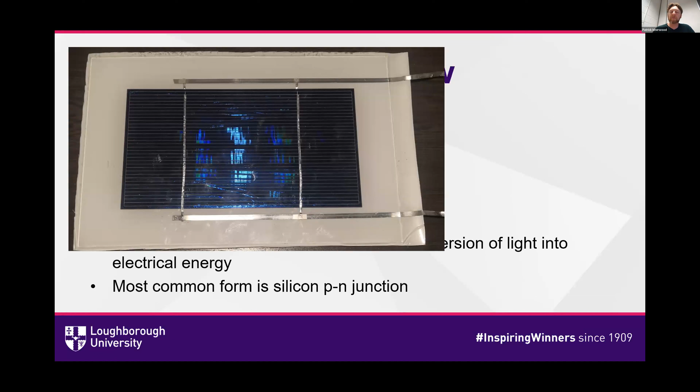I mentioned CdTe before, and hopefully we'll have a bit more detail on CdTe recycling later as well. This is just for comparison. This is a research CdTe device made at CREST. But it's these guys, as I say, that I will mostly be talking about, the silicon modules. They cover about 90%, 92%, something like that, of the current panel market.

Okay, so why do we really need to think about recycling photovoltaic modules? Why is this an issue? Well, first of all, the installed capacity of photovoltaics in general has been increasing approximately exponentially for about a decade, maybe a bit more at this point, which is a really positive thing. That's great from an electricity generation perspective, but it does create problems in terms of the waste, the end of life issue with PV modules.

So broadly speaking, modules tend to have a stated lifetime between 20 and 30 years. Usually about 25 years is the industry standard. What this means then is that the number of modules coming offline will also increase approximately exponentially within the next decade or so. That means that we're going to end up with an exponentially increasing number of waste modules, or end of life modules, let's put it that way, as we move forwards.

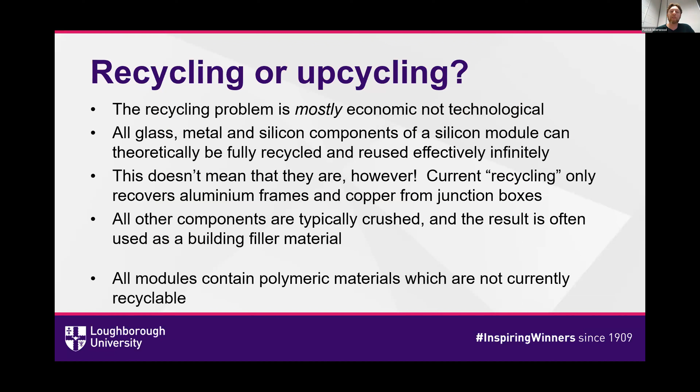This is all then held together using an encapsulant, which is essentially a kind of adhesive. That's effectively what holds the entire module together. You've then got some kind of protective polymer backsheet, and then the whole lot is held in place by an aluminium frame. You typically also have some kind of a junction box on the back, which is basically the point where you can extract the current from the device.

And essentially, that gives you a thing a bit like this little cell I showed at the start. So this is very much the same thing. It's only got one cell instead of half a dozen or however many.

So when it comes to recycling these things, you can split the different processes up into two general types, if you like. We've got delamination processes, where essentially what you're trying to do is separate the module with as little damage to the internal components as possible. Or you've got crushing processes where you don't really care. You just smash the whole thing up and separate it out later.

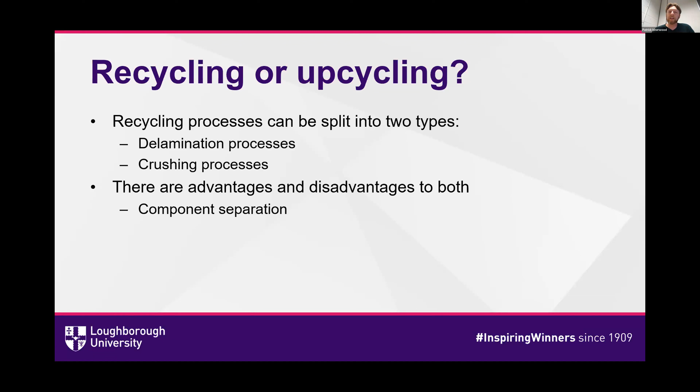Otherwise, if you're doing something like a crushing process, you tend to have to use some sort of density separation system, so froth flotation or a dry separation process. Those are a bit more complicated, but actually they're fairly well understood. They're things that the mining industry have been using for a very long time for ore extraction and ore concentration. So actually, we know how to do that. We're pretty good at that.

I already mentioned a certain amount of manual versus automated processing. This is quite an important thing to consider, because obviously it will determine things like labor costs and so on, and also to some extent how fast you can run the process. And then of course there's things like environmental concerns. So particularly with some of the pyrolytic processes, waste gases are a major problem.

A lot of the backsheet polymers are typically fluorinated, so you can end up with fluorinated waste gas, which is an environmental pollutant. A lot of the processes also use some fairly nasty solvents and some pretty unpleasant chemicals, things like nitric acids, hydrochloric acids, and so on.

So that's not necessarily a problem, but it does mean that you need to be quite careful about what you do with that, and then what you do with the waste materials or the solvents and the chemicals once you've used them. What do you do with them? Where do you send them? There are waste streams for dealing with that, so we can make use of that, but it's definitely something that's important to think about.

Okay, so moving on then quickly, just very aware of the time, to what exactly it is we can extract from a module. Well, there are three key expensive parts in a silicon module, if you think about it. Silver. It's actually a fairly minor component of a module, but in terms of value, it's one of the higher value aspects of a module: the silver bus bars, which are usually screen printed onto the top.

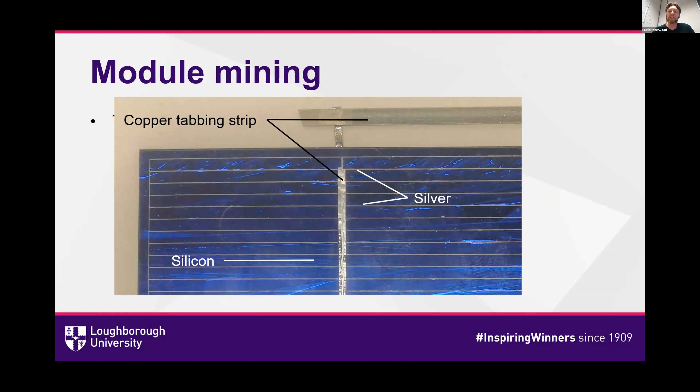So just going over those different parts, you've got the silver bus bars, the thin wires that are screen printed onto the top of the cell. You've got the silicon, which is the blue colored wafer underneath, and then the tabbing strip, which is actually copper. It doesn't look like it, but that's because it's pre-soldered, so it has a solder layer over the top.

It's worth noting as well that the proportion of silver and copper in a typical module is actually considerably higher than most commercial ores for these two materials. So extracting the silver and the copper from the module should be economically viable, and it should really help with the economy of the recycling process, in theory.

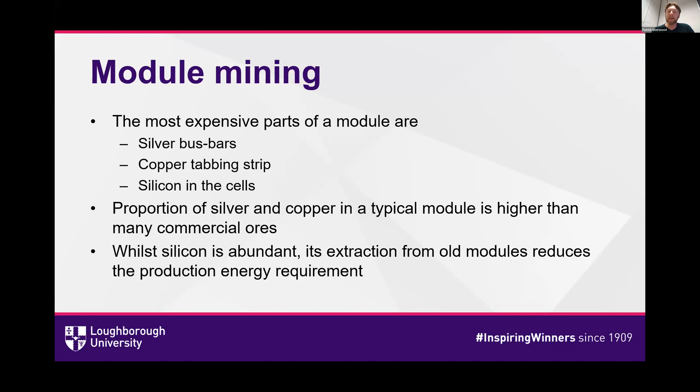And while silicon is definitely abundant, its extraction from old modules should, in theory at least, reduce the energy required for the production of new silicon. So again, in theory, there should be some kind of a saving there. That isn't to say that there necessarily is, but in theory there could be. You will, however, initially at least, only be able to extract metallurgical grade silicon, the lower grade material, which will then need some sort of purification to get back up to the solar grade material required to produce new devices. But at least it's some way there.

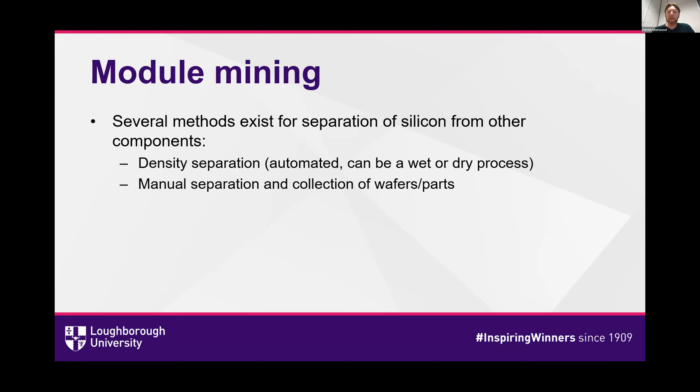As I've already mentioned, there are a number of methods for the separation of the different materials, the different components. So we've got density separation, which can be automated, and can be a wet process or a dry process. There's a number of different ways of doing that. There's then manual separation processes. Typically, they would be used with a delamination process rather than a crushing process.

And there are various different automated processes as well. Some of those things can be automated, some might not be able to be, or it might be easier to. It depends very much on what exactly it is you're trying to do, but automation tends to be quite a good way of increasing the rate with which you can do things and making things a bit cheaper.

As I say, the silicon, once you've got it, is then metallurgical grade. It does still require refining to get back up to the true feedstock, the solar grade material. And that's quite expensive. My understanding at any rate is that for now, it's still not necessarily economically feasible to get back to solar grade silicon during the recycling and recovery process.

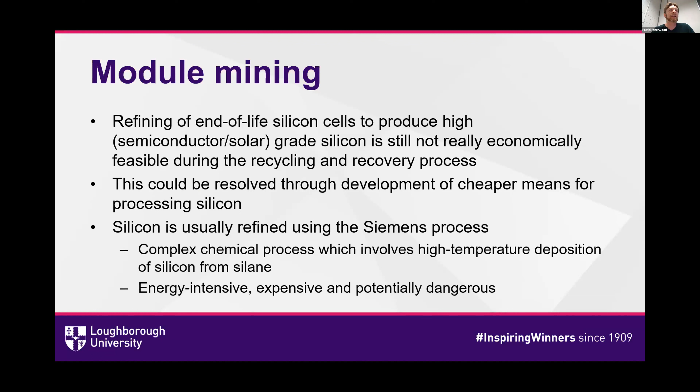But that could potentially be resolved if we could find a cheaper means for processing silicon. That might be a big ask. It's quite a difficult thing to achieve, certainly, but there may be ways of doing that. Silicon is typically refined using a thing called the Siemens process. This is quite a complicated process. It involves very high temperature deposition of silicon from silane gas. So it's an energy intensive, quite complex and relatively dangerous process. It's not an easy thing to be doing.

Okay, so moving on to the polymers and the polymer elephant. So the key thing here really is that all current modules contain polymers in some form. In particular, the majority of modules, although not all, most of them have some sort of composite polymer backsheet, usually involves something like Tedlar or some sort of similar material.

These are all fluoropolymers, so polymers that contain fluorine. The reason for that is because it repels water quite nicely. They tend to be quite hydrophobic in that sense. So it's a good way of maintaining the integrity of the module itself.

Okay, 2 minutes left. Thanks, Lewis.

And pretty much all modules use EVA, ethylene vinyl acetate, as a binder. That's the kind of adhesive. So composites, first of all, are quite difficult to recycle because of the different materials they contain. And particularly if they've got several different materials in there, that can make it really quite complicated because you don't necessarily know what's in the material and what isn't.

And EVA is a copolymer. So the problem with that is it's a blend of two different materials. What that means is that you get some cross-linking between the two. So that can be a real issue because you can recycle it if it's not cross-linked to some extent. But my understanding of it, at least, is that once it has cross-linked, it becomes really quite difficult to recycle. So this is really quite a serious challenge. It's quite a difficult thing to deal with.

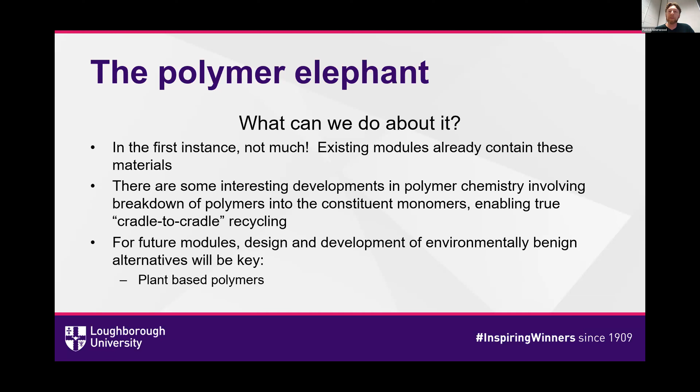And for future modules, the design and development of environmentally benign alternatives is going to be key. So something like plant-based polymers, such as starch, for instance, or viscose, where because it's plant-based, you can recycle it, but if you can't recycle it, you can burn it. That's not ideal, but it's not the end of the world. It's a relatively recent carbon material. It's not a fossil material.

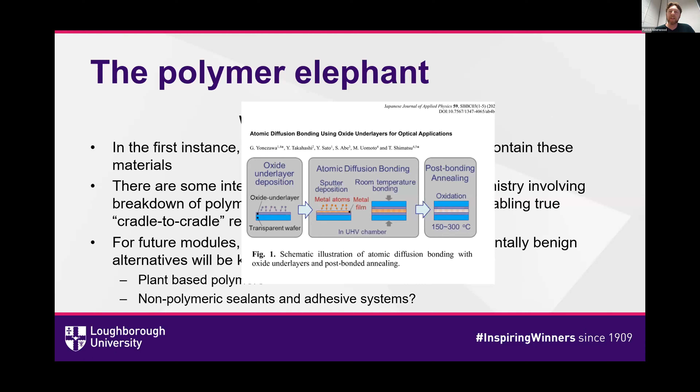Or alternatively, a non-polymeric sealant or adhesive system. Now, this is more complicated. There are examples such as this paper here, but they're quite difficult to achieve, and I'm not really sure how viable that is, but it's definitely worth a look.

Okay, so I guess the key takeaway from this is that PV module recycling, refining, upcycling of constituent materials is really important. It's a key area for further research and development. An awful lot of the issues, pretty much everything apart from the polymers, really is economic, not technological. And finding economic means for the production of high-grade materials from end-of-life modules is really, really important. It will mean that we can get full recycling of the modules, and it will be a competitive alternative to the production of virgin materials. But the polymers are still an issue.

So just very, very quickly then, my thoughts for the key places to go for the future. Module construction: I think it's really important to try and design modules both for long-term outdoor stability, which we really need, but also for the ease of deconstruction and recycling. It's quite a big ask, but I think it's an important thing to try. And then to develop sensible and fully recyclable alternatives to the polymer materials which we're currently using. So something which we can recycle more readily, or alternatively, which is plant-based.

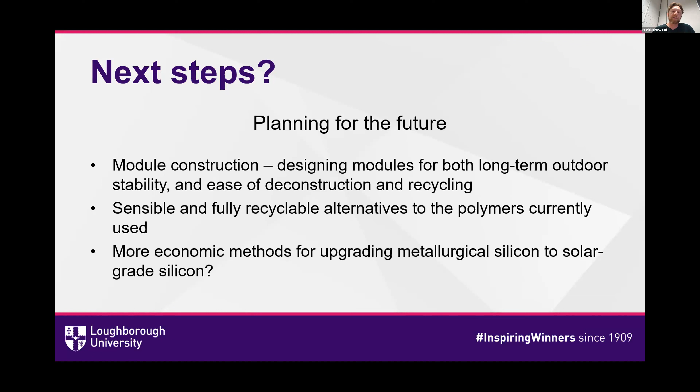And then finally, more economic methods potentially for upgrading metallurgical silicon to solar grade silicon. That's a big ask, but if we can do that, that would be a really big breakthrough in my opinion. Okay, thank you very much.

Excellent. Thank you very much for that, Patrick. So we have some questions that have come in. One from Andrew Urquhart, who is asking about silver. He's quoting a BBC article saying that silver's going to become a bottleneck to manufacturing some of the new panels in the future. So what other comments do you have on recovering that valuable material from the panels?

Well, I think it's a really important one to recover, certainly. Silver is an interesting one. It's not actually hugely rare, but it's not very common either. It's a precious metal for a reason. The reason it gets used for the bus bars is that it's, I believe, the most conductive single element metal that we have, and it doesn't oxidize very readily. I mean, it does, but it doesn't oxidize that quickly. So it's a really good material from that perspective. It's a really good current collector.

So in theory, we could replace it. We could probably use copper as an alternative, or possibly something else, but it's difficult. There's nothing which is ever going to be quite as good. If we're going to carry on using it, then absolutely, we need to be recovering this stuff. I think that's fairly key. Because it's expensive, recovering it is likely to improve the economics of the recycling process. If we can find an alternative, then fabulous. But definitely it's something that needs recycling, and recovery and reuse is definitely the way forward, I would say.

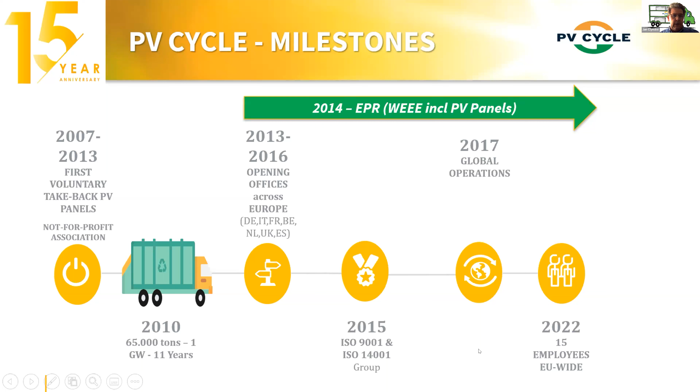PV Cycle as well has established a quality management system since 2015. We are more and more operating on a global level, and we run everything for now with 15 to 16 staff members. And that's what we're doing.

Already highlighted by Patrick, a PV panel. So maybe a weird slide, but I'm always showing it to the PV community in that sense that when a waste guy, a true recycler, I mean, one who is already in business since many years and is only crunching material and waste, is looking at a PV panel, he says, wow, this is 80% or even more, 90%, or even 95, depending on which technology. It's a bunch of glass, a lot of flat glass, and a bit of ferro and non-ferro metals, whereby aluminium is taking the biggest share, followed by a bit of plastics and a bit of other ferro and non-ferro materials.

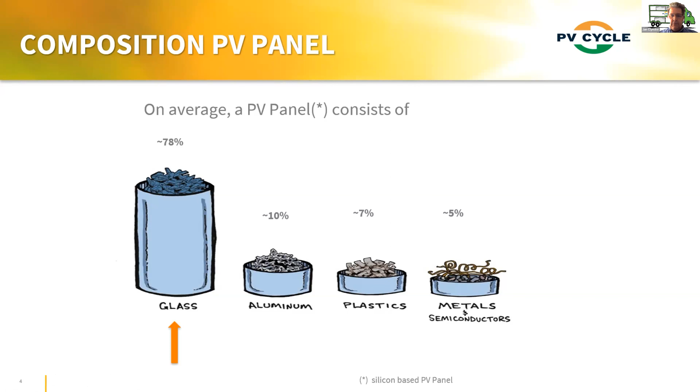It's not metals and plastics. It's not like your laptop. It's not like your mobile phone. It's not even like a washing machine, which is full of metals. So it's a glass, mainly a glass product.

And that's important. But what is also important is that the PV panels, and it was tipped off in the question of Silvana to Patrick, yeah, what about, do you want a product which has a long lifetime, which has a product guarantee of 10 years, performance guarantee of 20 years, maybe some feed-in tariffs by some policymakers giving you 15 years or 10 years or whatever, some money from the government?

Do you prefer this? That it prevents for many years waste, that it prevents for many years cost for the society? Do you want this as community, as society, or do you really want a mobile phone, Steve Jobs coming on a stage every year and telling you, I have a new product, throw away the other one and buy a new one?

That's also an option where you can stand in, but then you are not really preventing waste. So then you are in the classical economy of producing, manufacturing, and consuming as fast as possible and generating as fast as possible waste. PV panels are preventing waste for a long time.

And when they even become waste, especially the ones which economically have an end of life, the bigger investment PV power plants, well, most of them, maybe, yes, you can reuse them. Why not? You can extend even their lifetime. So it might be still extended with 10 years, and then they only become really a waste product, which then, yes, you can throw into the recycling and the recovery and the treatment, and you treat the products with a pre-treatment facility, with a final treatment facility, and so on.

And of course, we avoid disposal and landfilling, at least in most of the countries on this planet. So that's what I said at the end. Yeah, we miss the waste. Where is the waste? It sounds a bit weird, yes, asking for waste. But on the other hand, we have to stress much more as industry that we are preventing waste, that we are preventing cost for the society and for a lot of other items as well.

It's what I already explained, but that's here also the question raised by Silvana again. Yeah, is this what we want? Do we want to develop an easy to recycle, an easy to reuse PV panel where maybe with 3 clicks you remove everything, the glass, the junction box and whatsoever, and you can easily detach it and you can easily repair it, you can easily recycle, but then you will have a product with probably a lifetime of 1 year, because a PV panel, once it's sold, it's really living outside.

It's not like your mobile phone. It's not sitting in your pockets. It's not like your washing machine, which is protected in-house and so on. No, it immediately lives in temperatures of -20, +20, +40, sun, hail, storm, snow, wind, whatever. So, or do you want really a product which has a long lifetime, which is generating electricity for a long period, which is really a good investment product? So that will be the challenge or the curse. That's up to further discussion.

And about reuse, there is a huge potential here as well that PV panels are contributing to an extended lifetime, but we are looking for conditions which at the end of the day, you have a qualitatively and environmentally sound reuse activity.

Without guarantee, maybe, okay, why not? But at least then also for the ones without guarantees, make sure that they have undergone some testing, or you really give them also a guarantee of maybe 1 year product guarantee, 18 months of performance guarantee, and you also provide them with some extras, which you will see in a minute. But that's the main question here as well.

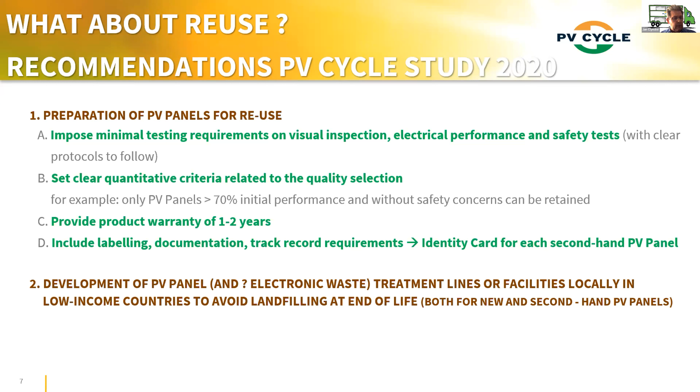because what we see today in the study is that a lot of these panels are shipped to Sahel countries in Africa, Afghanistan, Pakistan, Palestinian territories, and Turkey. Those are the top destinations of what is currently called in the business reused PV panels. Then you have to ask yourself, do all those countries have a good waste management infrastructure today, at the same level as some countries in Europe or other territories of the world? And the answer is no.

And of course, what is also very important is that a reuse center, which is really preparing the panels for a second life, has clear criteria and clear requirements on what has to be in place there. Do they need skilled people or not? Or people who have no clue what AC and DC means? I think they need them, because at the end of the day, it's a product which is generating electricity, far more challenging, I would say, than repairing a laptop, which is consuming electricity.

So the guarantee I would like as a purchaser, as a buyer of secondhand PV panels, I would like really a true guarantee, and I would like to be 100% certain that I buy something very good, very qualitatively, and that it's properly done, and not something which is just a little bit washed and go, and then it's sold online and whatever, and you have no clue what you're buying.

So that's also why PV Cycle, after the study, said, okay, let's try to initiate maybe a standard. And our hope was maybe getting this done on a European level, but an opportunity took place, and we could even bring it to the IEC level, the International Electrotechnical Commission, where in Working Group 82, we put it on the table saying, guys, this is the item, and it would be good to have an international standard that all countries around this globe apply the same thing.

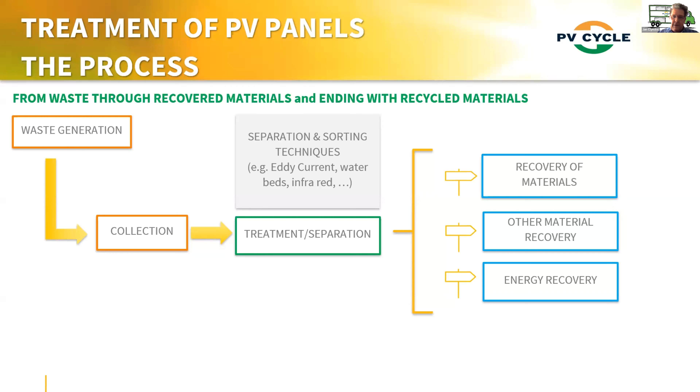So I would invite you all, visit waste recyclers, visit waste management companies, and that will already help a lot in the whole discussion. But anyway, once it's all treated, materials are recovered. Then you can really recycle the mono materials, which are glass or copper or whatever. But you will always have materials ending up in other material recovery, for example the smelters, and you will have material which is ending up in energy recovery.

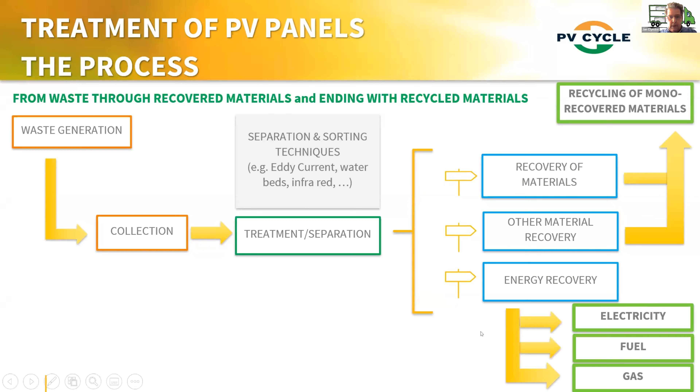I'm also seeing that I have to speed up. Generally speaking, we have an average recycling rate today of 70%. Is this good or bad?

I think it's quite good if you compare it to all the products you see here, which are also under EPR in Europe. A lot of them are below the 70%. But as I already mentioned several times, volume, that's the big thing, and that's the big discussion. Do you want very consumable PV panels to put on the market, or really products which have a long lifetime and are an investment?

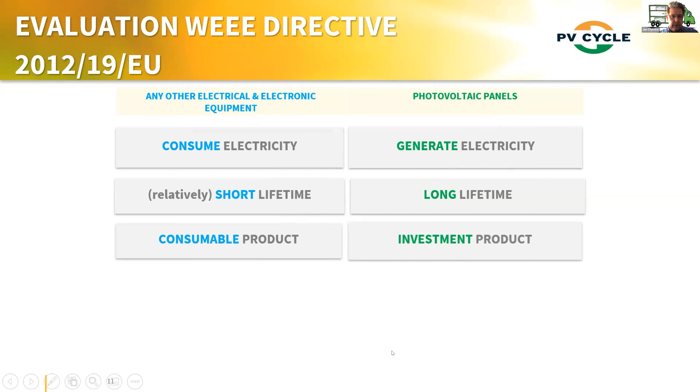That was maybe our evaluation, and it has been recently published, our evaluation of having PV panels under the WEEE directive. I will not go into detail. You just see them, and you see constantly the difference between PV panels and the other electronic equipment of the WEEE directive. And you see that there are big differences between both products constantly. The one has a stable market, the other has maybe a more volatile market.

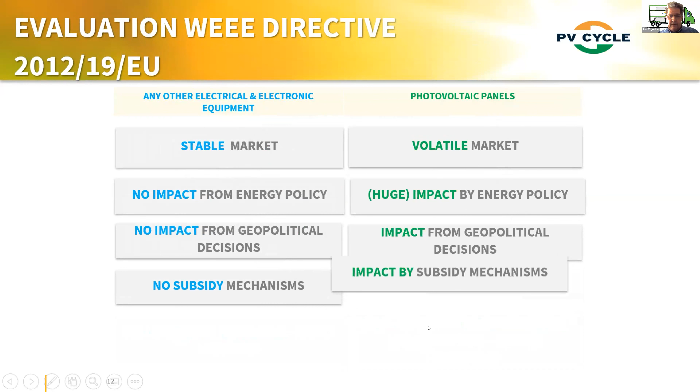When somebody decides in the eastern part of the world to invade another country, like it happened last year, it has immediately an impact on our business. I don't think it has an impact on the sales of iPhones, for example. So that was a bit our evaluation of the WEEE directive. I will leave it as it is and not focus too much on it, because we are running into a final slide, which is a short evaluation about the United Kingdom. I would say the evaluation is a little bit the same.

So our message is really, as PV Cycle, after all those years under the WEEE directive, this has never been the proper instrument to manage extended producer responsibility for products with a very long lifetime, which are investment products. We are pleading for a separate legislation. We are not arguing about the EPR, but we would really look forward to something for all renewable energy equipment and products, putting there also all the products which have a huge investment potential.

Because discussing collection targets for PV panels based upon the sales of the past 3 years, that's completely insane, because nothing is coming back. So we will never achieve the targets. And in some countries today in Europe, you even receive fines as PV Cycle because you did not reach those collection targets. So that's insanity. But the same evaluation of the WEEE also applies to the UK.

Also, the UK has a huge challenge, Lewis and the rest of the engineering community, looking for environmentally sound treatment for PV panels. That's really today a challenge in the UK. And what we also see as PV Cycle is a huge impact of Brexit: it's more difficult to ship PV panels out of the UK to the continent, where today environmentally sound treatment exists.

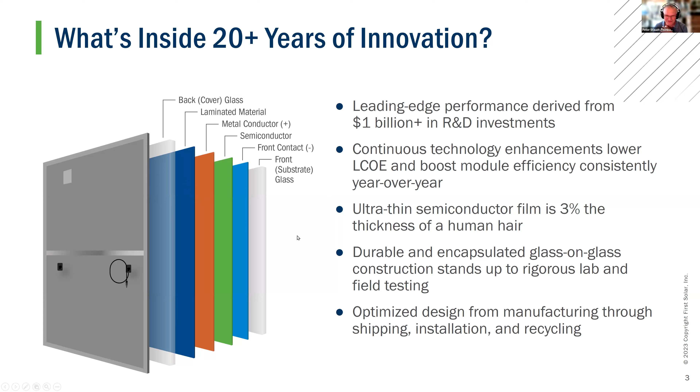We need a back contact, obviously, and then we have the lamination material, which has been EVA in the beginning, but I think now we are using polyolefin, which is a little bit simpler for recycling, and especially it makes the whole chemistry of the module more stable, so we can have a better lifetime.

So that leads us to our recycling process. You can see here our old Series 2, 3, 4 modules, they all had the same size. They go to a shredder first and then to a hammer mill, where we have particle sizes of around 4 millimeters. After that, it goes to a leaching process where we use sulfuric acid and hydrogen peroxide. Then we can separate the materials, mainly the glass, which is around 90% in our case, the polymer, and the semiconductor material, which is precipitated out of the solution of sulfuric acid and hydrogen peroxide.

This one goes to refining, to special companies like 5N Plus in Canada, and they again produce high purity cadmium telluride, which we use to build new modules. So we have a real recycling process here. For the glass, in Germany we have a first generation recycling plant where the cleanliness of the glass is not good enough to produce glass products. So that is used to produce insulation material for the construction industry. And the main reason for that is really that the volume is not high enough.

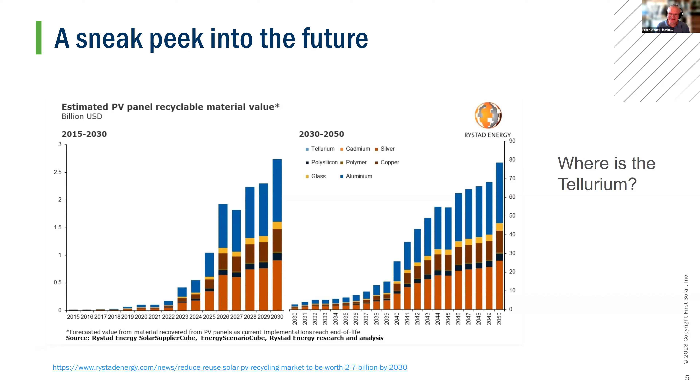And it's only a byproduct of copper and tin mining. So we really need to have the global tellurium base for First Solar to achieve that 20 gigawatt production capacity. And that's one of the main reasons why we started recycling so early, because we knew we need the tellurium back.

So to have a broader view, I like to refer to the work of the Club of Rome, which built that famous World 3 model 50 years ago, which has seen a lot of criticism, mainly from the fossil lobbyists. But there are also recent investigations, and they found that the current empirical data is broadly consistent, even with the 1972 projections. And in my opinion, that is frighteningly accurate, and it's really extremely important that we change the whole economic system with respect to material use and use of our environmental resources.

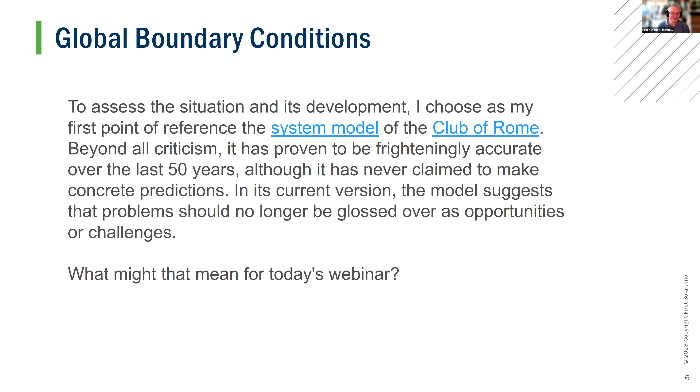So the latest outcome of the Club of Rome working group has defined 5 turnaround actions to mitigate the worst outcomes of the climate crisis. And turnaround 5 is transforming the energy system. And there's one tiny remark, so drive down use of materials. So that's where we come in.

And we see from our old modules, which are running now for 20 years, they are still in good shape. They show better performance than what we guaranteed. And they are good for at least 30 years. And for the new modules we produce, we expect that they have a useful lifetime of more than 40 years. And also in the silicon field, there are meanwhile producers who give a guarantee of 30 years.

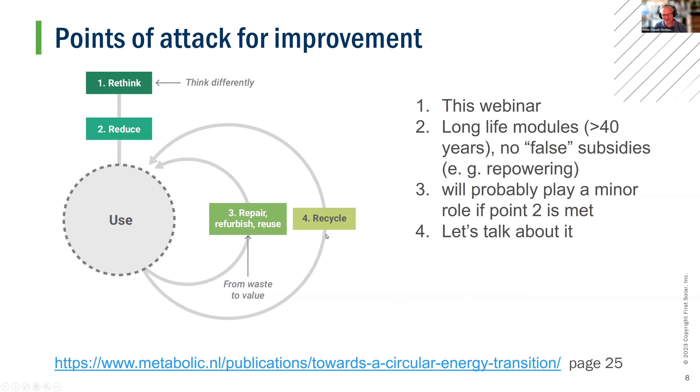We have nothing in to repair, not even the diodes which are used in the junction boxes of the silicon modules. So if our module is broken, it's broken. If it does not produce power, you cannot do much. So, and then of course you come to recycle. And that leads us to the problems and potential solutions.

So Jan showed a picture where he had neatly stacked modules on a truck, which looked like they were new. That's not what we see. We mostly get improperly dismantled and significantly soiled modules back. On average, I would say 50% of the modules are broken already. So that is also a problem for automatic handling if you try to do this. The point is that the dismantling is mostly done by cheap manual labor.

And as long as the end of life modules do not have a monetary value, I don't see a possibility to change this, at least not for our modules. So, in my opinion, we need to put that value into the module by regulations, by CO2 pricing, whatever you can do that makes sense to get that value into the end of life module. So everybody would be interested to give it back to get some refund. So that would for me be one important step.

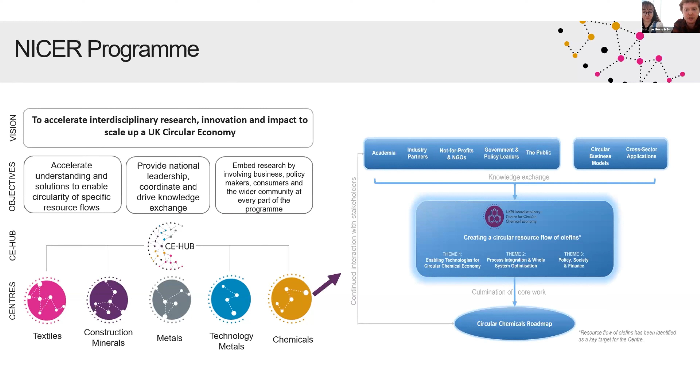Now, what Circular Chem are trying to do is create a circular resource flow of olefins by using a whole systems approach. Our stakeholder engagement and knowledge exchange inform our core research themes, which will then culminate in a roadmap which I'm currently developing as well. So who we are: not just the Circular Chem Centre, but we're also part of the Energy Materials Lab, and Susanna's going to present a little bit of work later on in the case study of the Vital Living Lab, and our PI is Libby Gibson.

So why are we doing this? We need to move away from fossil-based feedstocks for our energy supply. I think around 87% of GHG emissions are from energy production. We also need to create a more resilient supply chain and infrastructure. We can see from recent geopolitical crises, such as the Ukraine-Russia war, that reliance on one particular energy source is not resilient infrastructure, and the general consensus is we need an energy mix.

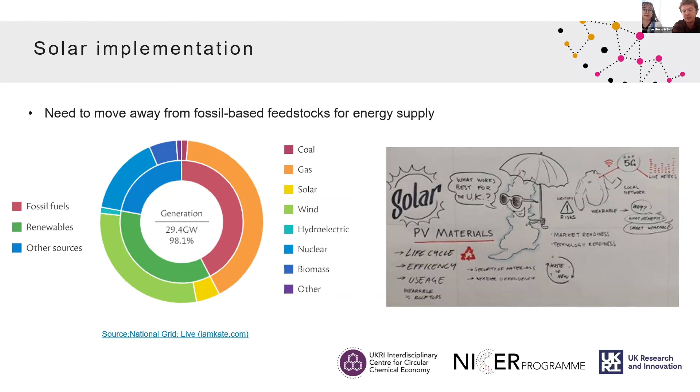What are the main barriers that we're starting to see with circular PV? There's significant waste generated in current established solar PV technology. I think there's projected to be about 78 million tons of silicon PV waste by 2050. As Patrick mentioned earlier, with the lifetime that we have for current panels, we're going to see a huge influx of silicon PV waste by around 2030.

Other levers that they can use, such as feed-in tariffs, which discontinued in 2019, are a bit of a missed opportunity to utilise a lot of the rooftop spaces we have in the commercial and industrial sectors. Government stats suggest there's about 250,000 hectares of south-facing roof space we can take advantage of in the UK.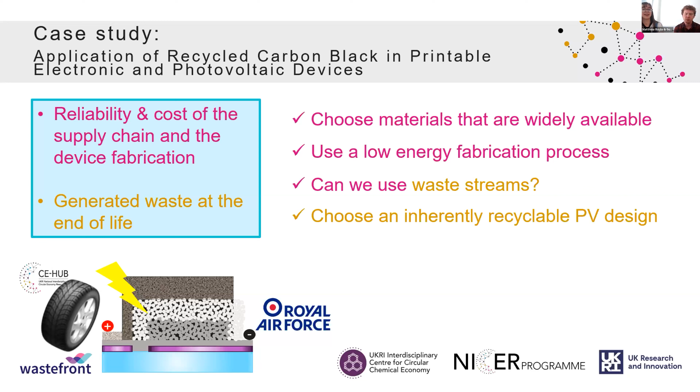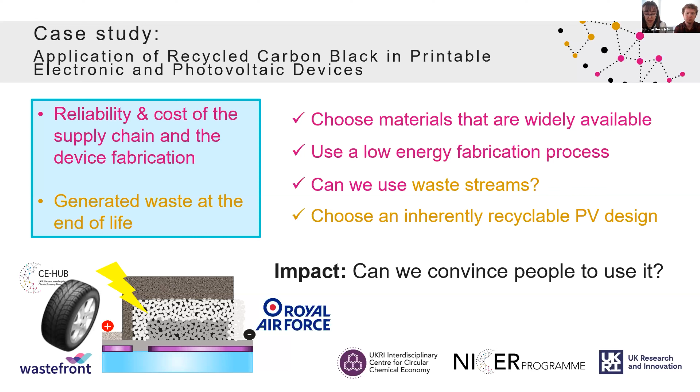And then finally, we also need to choose an inherently recyclable design so that we don't have to worry about how we're going to recycle something at the end of its use without thinking first on whether it was recyclable in the first place. And I wanted to add a last one, and that is the impact, because even if we manage to get to this point where we have a very inherently recyclable technology and we don't generate waste, can we convince people to use it? Do they know that this exists? So I'm going to tackle all these points in the next slides.

And for that, I'm going to start talking about the device technology that we're using. For this case study, we started using a device architecture that is called the triple mesoscopic stack. So basically what we have in here is several layers of different materials, which are the transport layers, so the charge extraction. And then we have, let's say, the magic layer, where the magic happens, which is the photoactive layer. This is the layer that is going to absorb light and then generate charge.

And for this particular case study, we chose halide perovskites, although we could have chosen another technology. We chose them because they're cheap. They're made of widely available materials. We can look here. This is the structure of a perovskite. They are ionic crystals with an ABX3 structure. So you have either iodide, bromide, chloride in the red dots. Then forming a cube, you have normally a metal that is predominantly lead, but it could be tin. And then in the center, you have either organic cations like methylammonium, formamidinium, or other inorganic elements like cesium,

potassium, etc. They have the advantage that they are easily processable at low temperatures, because they can get dissolved in a solvent, and then you can pretty much create an ink, and then you can print these inks and it dries at 100 degrees. So low energy processing, as we ideally wanted. They have the peculiarity that depending on the elements that you choose to form them, you can change the color, which means you can absorb into different wavelengths. And that allows you to do interesting things, like getting different colored cells and working with different absorbers as well, so that you can create a tandem, for example.

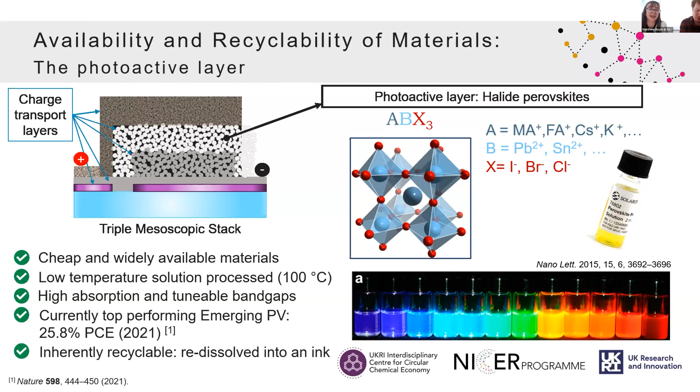Now, on to the second part of the device. So we've talked about the photoactive layer. Now we have to talk about the other layers that I highlighted before that in theory aid charge extraction. And those are also made of cheap and widely available materials. For example, you've got the counter electrode, which is in this case carbon. We've got a spacer, which we use just to prevent the carbon from touching the other side of the cell and creating a short. In this case, we chose zirconium oxide. The titanium dioxide will help the electron charge extraction. And then we have another electrode, which is a transparent conductive oxide. In our case, it is fluorine-doped tin oxide.

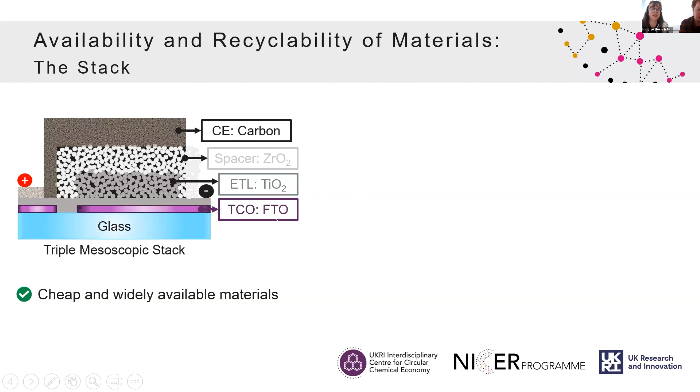Now, the fabrication process is very easy to upscale because it's a sequence of layer depositions. So you start with the spray pyrolysis of the compact layer of titania, and then you just build layers and anneal them progressively until you get the full stack. They are not as low temperature as the perovskite itself, but I think the maximum temperature you will be working with is 500 degrees, which is significantly lower than the fabrication temperature for standard commercial devices. And then in our last step, you just infiltrate the perovskite, and it crystallizes by heating at around 100 degrees. So that makes the process very easy and upscalable.

But then we've got an extra, which is we can reuse it. Why? If anything in the perovskite solar cell is more likely to degrade, that is the perovskite itself.

And if we were to remanufacture them, the only thing we need to do is dissolve the degraded layer with some solvents, re-anneal the stack to dry it off and remove all sorts of impurities, and it'll be a matter of just re-injecting again.

So as you can see in this project, we're considering circularity by design so that we are always able to do this cycle. Eventually, I'm assuming at some point they could break, but they are quite common materials. They could be scraped off the conductive glass surface, crushed and separated, and we could start again.

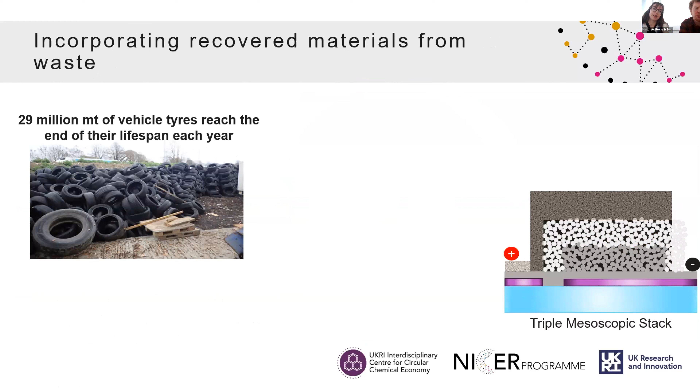Now, what we're doing in this project is incorporating tires into a solar cell, and you will ask how. Well, first of all, let me talk about the waste stream that we selected. In this case, we selected tires because we know that around 29 million metric tons of vehicle tires reach the end of their lifespan each year.

And if we think of what's happening with them, some of them will end up dropped in a landfill, around 10%. That has a problem, the risk of polluting water streams, just based on the fact that they're in the outdoors, it rains on them, then toxic elements percolate through the ground and contaminate water streams.

Another option would be to burn them to get energy, but we are releasing like 22 kilograms of CO2 per tire, so that's not ideal, and we're not even getting that much energy because it has a poor energy recovery, like 33%.

Another pathway is the standard recycling. They just get chopped and made into sport pitches, but at the end of the day, if they just get chopped and deposited again on the land, they're still subject to potential contamination or pollution of water streams because it will rain on them and that will percolate.

So what our partners at Wastefront have done is design a proprietary process that minimizes the waste, the use of CO2, water, and heat. And they produce pretty much two main products. One is liquid fuels, for which they have customers in place, and the other one is carbon black.

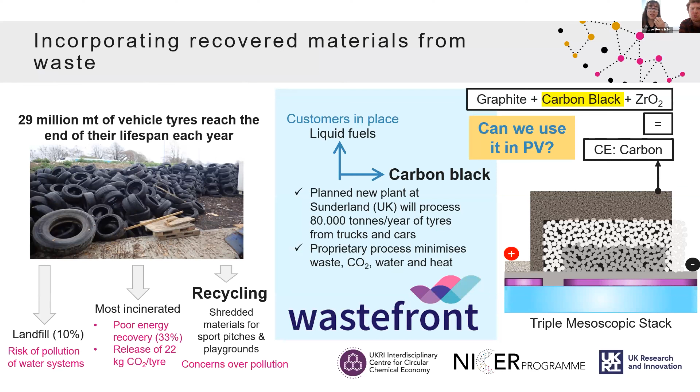So this carbon black is one of the components of the carbon electrode that we saw in the triple mesoscopic stack before. And that is what made us raise the question, okay, can we use it in photovoltaics? Basically, the answer is yes, and not only can we use it, but we can even improve the system.

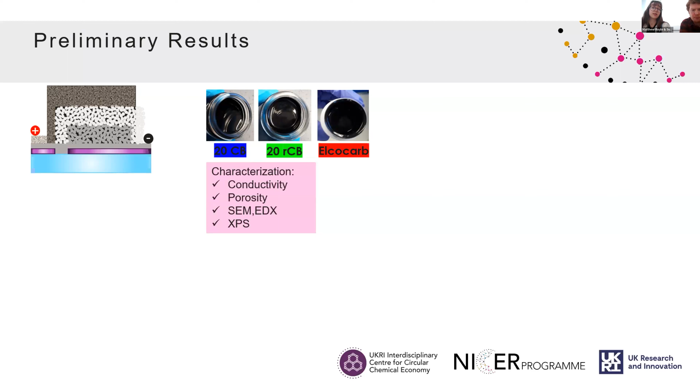So basically what we did, we made different pastes using virgin carbon black, which is the 20 CB, recycled carbon black, which is the 20 RCB, and the ElcoCarb, which is a benchmark, a state-of-the-art commercial paste. We built them into solar cells.

So we had a reference, number one, the monolithic, which would be the full stack that is optimized, and it's purchased from the same company that produces the ElcoCarb. And then the other three, which are also purchased, go up until the zirconium layer, and then we deposited our ElcoCarb paste. And what happened was very interesting.

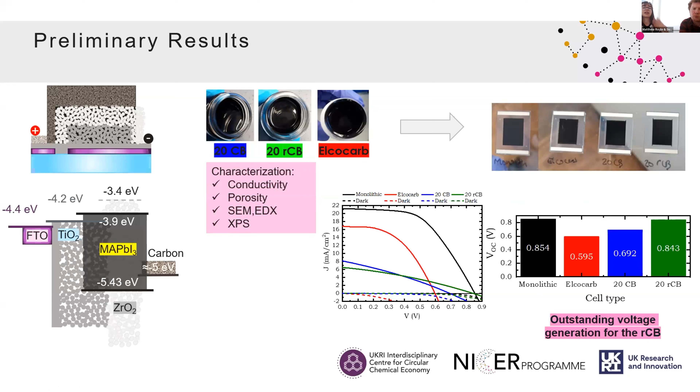But what was interesting is the fact that we got a really high open circuit voltage compared to the, let's say, commercial stack where we just infiltrated perovskite. And that made us think that indeed, the charge extraction layers are now extracting better. But when I mentioned the charge extraction layers, what I mean is how do they aid extraction?

Well, basically, if you connect a circuit or any load to the solar cell and then you illuminate the perovskite, you're going to be producing electrons that jump towards the conduction band, and then they get extracted by jumping into the conduction bands of the other materials and then running back and getting re-injected through the carbon. So if we were an electron and we had to run downstairs as fast as we could, obviously we would run faster if the steps are smaller.

So what we think has happened here is that the recovered carbon black has lowered this step, the valence band of the carbon, and that is what makes the open circuit voltage bigger. And this has to do mainly with impurities. Obviously, we need to keep doing more testing and optimization, but we're proving the point that yes, we can make perovskite solar cells using recovered carbon black.

Now, the last point that I wanted to talk about is the impact. So as I said before, even if you manage to get something done, can you convince people to use it? Or can you convince the authorities that this is important? So that's why we also embedded this project or case study into the Vital Living Lab project, which is a project of Newcastle University in collaboration with the Royal Air Force.

We have 5 main experiments. We have solar, we have geothermal, LCA and carbon accounting. We have sustainable transport and carbon capture. And basically what we're doing with these experiments, we're trying to help the Royal Air Force meet the targets to be net zero by 2040, but we're working with technologies at TRL level 3 and below, so very emerging. We're just trying to prove a point.

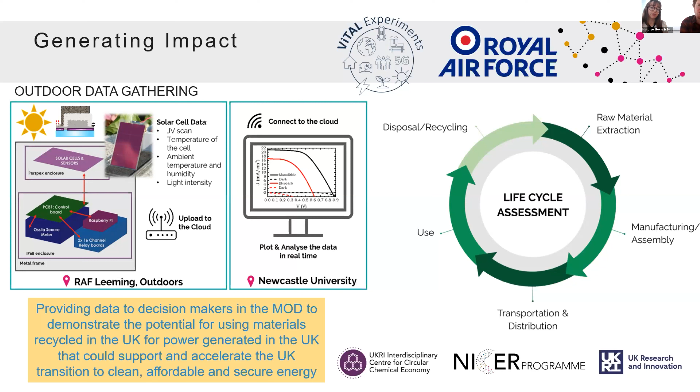And also within the same framework of the Vital project, the carbon solar cells case study will also be assessed by our collaborators in terms of life cycle assessment. So comparing using the carbon black from virgin sources versus recovered from the waste tires.

Final thoughts. I really wanted to make a first final thought regarding the photoactive material itself, which is halide perovskites. And that's where I'm bringing the point again of easy to make, yes, easy to break too. And the problem with the breaking is what happens with lead. We know that lead is a very toxic metal, it's a heavy metal. And many sources have said perovskites contain much less lead than just the soldering of traditional silicon panels.

And while that is correct, the problem is that the source of ionic lead in perovskites is 10 times more bioavailable, which means if it leaks into the ground, there's 10 times the chance of the plants absorbing it and then ending up in ourselves again. So we have to be careful with these. And that is not to say we need to ditch them, because they're very promising.

And there is research going into lead immobilization and lead capturing before they leak. And because they're inherently recyclable, we could take that lead back and then reformulate them again. So that wouldn't be a problem. But I want to make everyone aware that I'm not coming here with the only solution to our problem.

And that brings me to the second point, which I think is also a very important point to consider, that there is strength in numbers. We don't need to just focus on one type of technology in terms of photovoltaics, and there's space for multiple types of solar cells and applications. We have, for example, dye-sensitized solar cells gaining a lot of strength in the indoor photovoltaic market to power, for example, Internet of Things sensors.

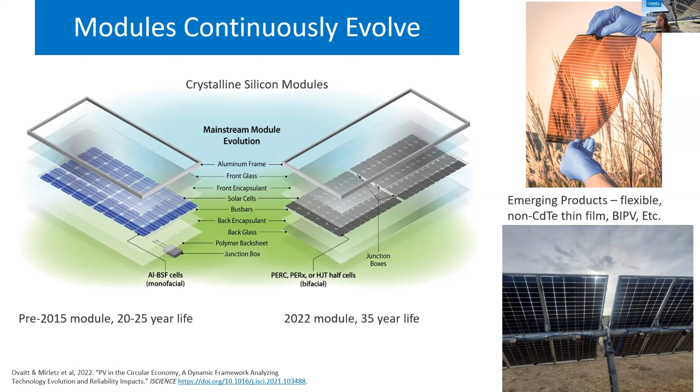So there's a big change, as well as all of the new areas or new technologies that are emerging, that are starting to grab some part of the market share and are predicted to grow, like silicon heterojunction or TOPCon. So it has switched a lot in cell and module technology, and it will continue to do so, which poses an extra challenge as we make all of this deployment. Because we need new fabrication, new machines, new steps, plus the fact of making more of them. So it is a compounded challenge.

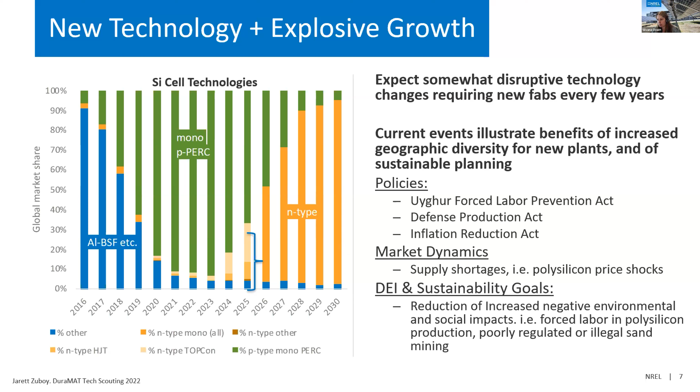Add to this that obviously manufacturing doesn't happen in a vacuum. We have a lot of policies for manufacturing, at least in the US. Also in Europe, I'm learning a lot from the recycling and end-of-life management policies. So added to all of this, we need to be smart on how to achieve the deployment so that it is sustainable and actually achievable to us. That is why sustainability is an important topic in the PV community.

We have this goal of the 600 gigawatts per year deployment, and that takes a lot of materials. So there are various ways that people have said, this is how we can solve this. We can perhaps make the modules more efficient. That is always a goal that we have, to increase our efficiencies. We have talked, maybe we need to make modules more recyclable. Maybe we need to make them more long lasting or less material intensive.

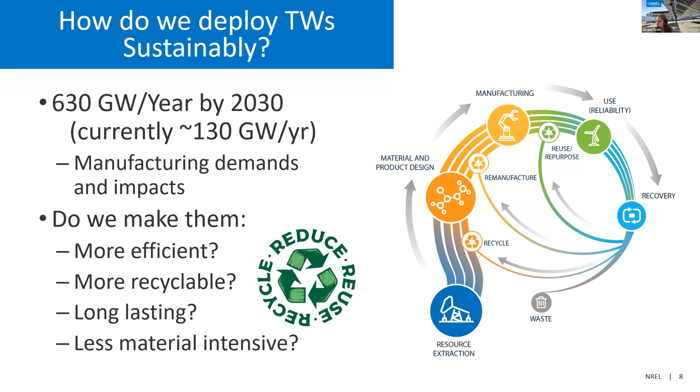Lightweighting modules: glass thickness, for example, is predicted to continue to go down, as well as silver. So reducing the material composition and changing it is what we are researching. So all of these are strategies that we can use that follow circular economy concepts of reducing, reusing, and recycling, etc.

However, circular economy is not very well tailored for analyzing PV. Why? Because it doesn't really consider the fact that this is not a toaster. This is a solar panel that is producing energy, and what we want it to do is to produce energy for as long as possible. It's also not a cell phone that we want to change every year or every 2 years. So to really make a good assessment of the sustainability, you have to go beyond circularity metrics as they are conceived now and think about the energy and the carbon impacts.

I don't really think that that is a good idea, because our goal right now is to decarbonize. If you take anything away from this, recycling is awesome, circularity, sustainability, making PV green is great, but we really need to decarbonize. If we don't decarbonize, the climate change impacts will be much worse than this huge pile of PV modules, which I will put into perspective later in the talk. But there is not an option to deploy less PV or less renewable energy. The option is to do it better, do it smarter.

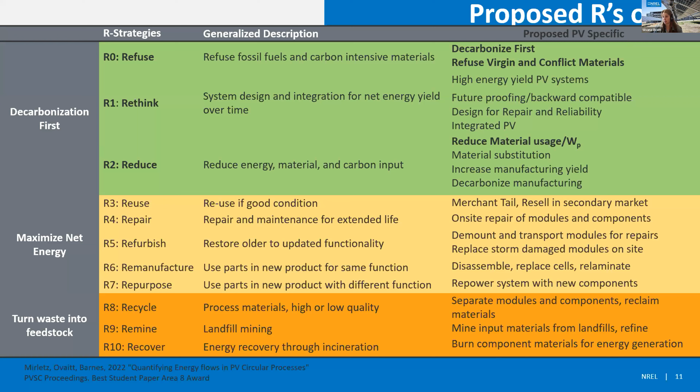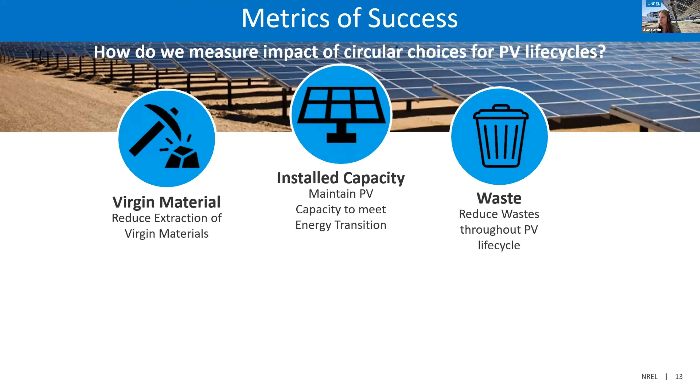So I mentioned circular economy metrics, right? So in general, we're talking about virgin material extraction, which is very important for producing all of this PV that we need to deploy. And then we have waste. That is circular economy. It's a mass-based metric. For PV, you really need to consider the installed capacity, right? And then you also need to consider the energy that's going into that, right?

Some processes that are making the PV are very energy intensive, but you're definitely having an energy payback time of less than 2 years for any technology right now. But we still want to maximize that to be the most sustainable with whatever strategy and module design we decide to go with into the future, as well as reduce scarcity of materials, right? If we are all struggling to get that silver, for example, that's not good.

Another little shout out to the capabilities of the software that I am presenting the results from. In case you're interested in using it, we can use any deployment forecasts. So that is for a state, for a country, for the world. They are rolling out new forecasts of PV deployment really fast. So this is very important, to be able to graph the latest 2023 PV deployment. We also have a lot of baselines that are dynamic with time.

So most analyses that you see on mass flow take a module that's just, for example, 70% glass, 20% aluminum, etc. So we have actually looked historically at the literature and market shares to come up with the module composition and how it's evolving, and looking also at the projections, for example, from ITRPV on how silver is reducing, etc. So it considers those improvements that are foreseen.

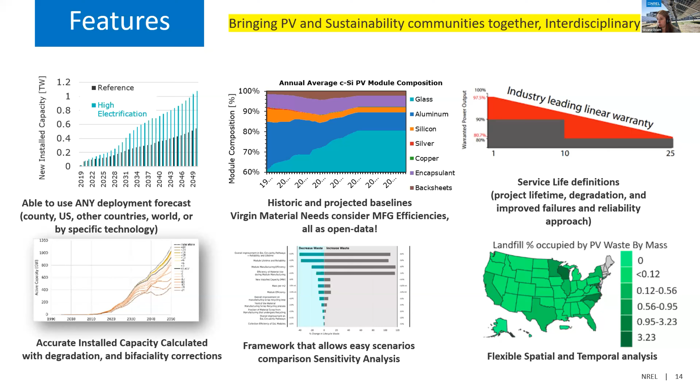So showing you some results on 3 of the main sections. So first question, circular economy, virgin material, how much do we need and do we have enough, right? So this is for the US. The US needs 75 million tons of virgin material for their goals at 2050. And 75 sounds like a lot, but as always, you need to put it into perspective, right? So in perspective, there is 40 million tons of electronic waste worldwide now. So it is a big number.

Let's put it in perspective though of the production of each material, right? For the US, into 2050, it's actually pretty low what we will need, but we are just one country, right? The real important takeaway is how much the world will need. So it got mentioned earlier in one of the comments, what about silver? Well, according to our predictions, which consider the reduction of silver in the different technologies as well as how these new technologies are going to take different parts of the market share, it is about 40% of the global production. So it is definitely high. It is not more than is being produced.

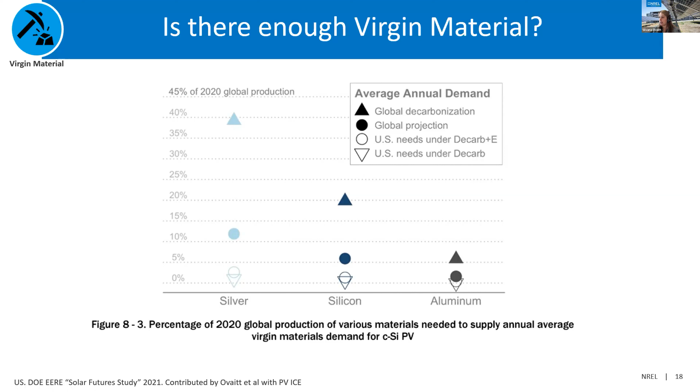But the other thing that I want to invite you all to think about is that mining is also an industry that is improving on itself, right? So years back, we had this panic about oil, right? And then new methods like fracking appeared and it changed. So the capacity is not static to what got produced in 2020. But anyways, it is still a point that we need to be aware of as a community, that there is a high demand of silver.

We have looked at this technology-specific with our tool, considering PERC versus TOPCon and silicon heterojunction, which are incoming and have different demands on the material, right? So as we can see, we are still at that kind of 40%, maybe a little bit less depending on which technology and projections are used. But the one thing that I don't want you to take away from this plot is, you may look at this and say, well, we should definitely not do silicon heterojunction.

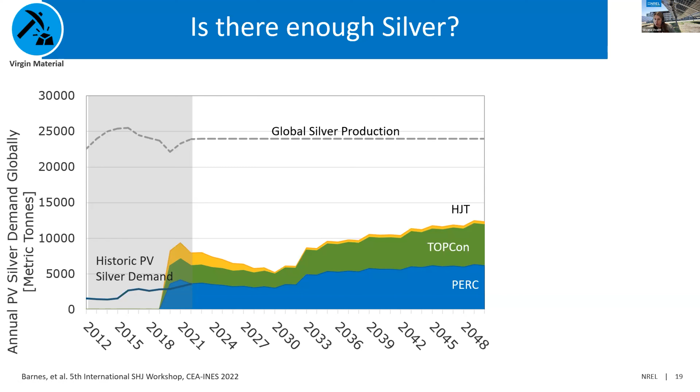We should all go for PERC because silicon heterojunction is using much more silver than PERC, right? So that will be the first approach answer that you may have. But this is, again, just the material story. If we add the energy story, the silicon heterojunction and the TOPCon are producing more energy cumulatively. So this offsets more of the also having less, perhaps, on the production side of the energy, right? So whenever we are doing these assessments, just looking at the mass is not enough.

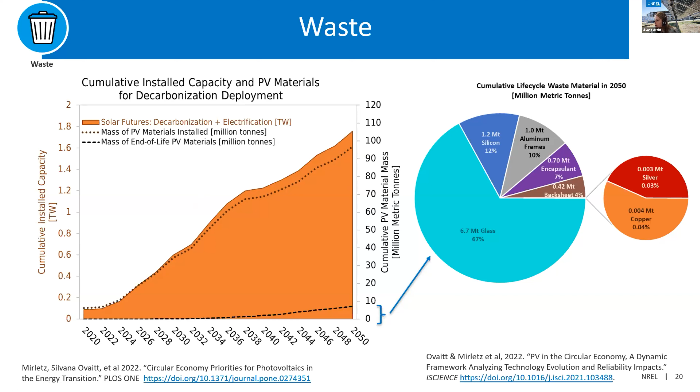Let's talk about waste. We have mentioned we have a lot of deployment. We have these mountains of waste happening, and that's why we should recycle to also maintain our manufacturing. It is a little bit hard to do a closed loop for PV because we have a lot of deployment here, and the waste is coming very shifted because our lifetimes are pretty long, right? Also, to put this into perspective, this is for the US, where we have this 1.7 terawatt of deployment. This mountain of waste, you can actually not see it compared to all of the other waste by 2050.

That doesn't mean we shouldn't care about waste. We definitely need to start being proactive about planning to manage it and using it smartly. We don't want to be one of those industries that greenwashes their sustainability, right? We care about the environment, definitely. But currently, and even on the future projections, it is small on scale, okay? But okay, let's say that we do want to reduce waste. So what is the best strategy?

So we evaluated all of these options of circular paths that we have, as well as knobs on decision points. Sure, doing everything will definitely reduce our waste, right? That is the top line. Doing recycling will definitely reduce our waste, but really the main lever for reducing the waste is having reliable modules, right? Not having them die before they're supposed to die, and having them have long life so that they are in the field producing for us. Obviously, they will become waste eventually, but it is reducing a lot of unnecessary waste and a lot of the manufacturing waste, which doesn't often get counted too.

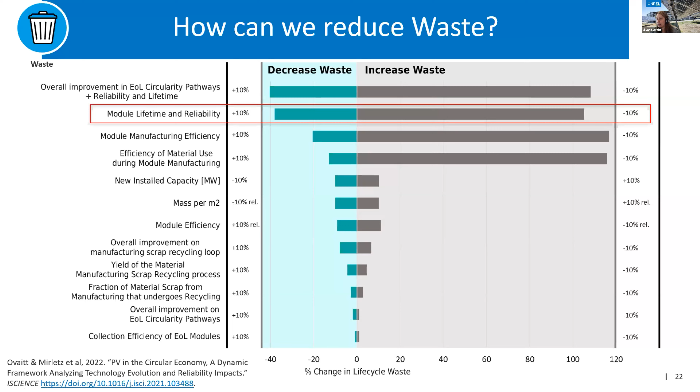On lifetime and reliability, we have had increased warranties, right? So going up to 30 years. There's actually one module that now has warranty for like 40 years. So that's really great. Project lifetimes have also gone up on par with that. So we're at like 32 average project lifetime.

So one of the goals that gets talked about is increasing lifetimes. Could you envision a 50-year module life? We already have 32. We already have projects that have been in the field a long time producing. So it is not unthinkable, once you reach that stability phase, to keep degrading, but keep producing and not failing, right? So lifetime is a very important thing for PV.

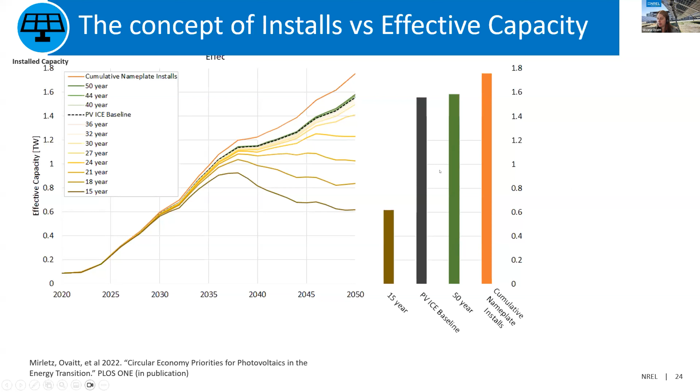So the replacement concept plays into circular economy very importantly. And this doesn't always get studied or mentioned in the approaches. Along with lifetime, degradation, right? So if you make the modules degrade less fast, like the ones that we're deploying right now at that 30 average lifetime, every 0.1% reduction in degradation saves you around 3 terawatts of replacement for a world scale deployment.

So that's another thing that we don't think, like, oh, we want modules to degrade less. Yes, why? Because that translates to having to have this install capacity target. We need less to be there producing or to be there replacing. Okay, cool. So we have goals for installing.

We want to install them high quality, but maybe you're just like, well, maybe my technology can be shorter lived and I can recycle it. So we explore that too. Those are the heat maps. Right now we are here on 32 lifetime average, 0% recycling, right? And this amount of virgin demands.

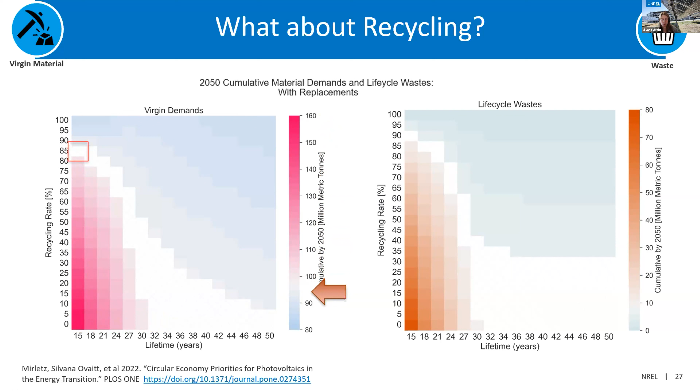If we go down to half the lifetime, we double the virgin demands to maintain that installation goal that we have. And then if we want to offset that by recycling, we have to go up to 85% recycling, okay? So mind you, this is 85% of collecting all the modules and then making the process and the yield and then close looping it at 85%, right?

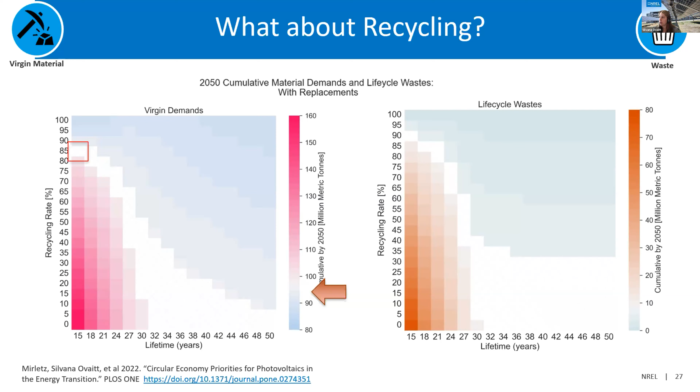So a previous company mentioned that they have 70% PV cycle, 70% efficiency overall in the recycling process, but that is of the modules that they already received. And right now we don't have methods to really capture all that PV that's being removed. Cool. So anyways, final words.

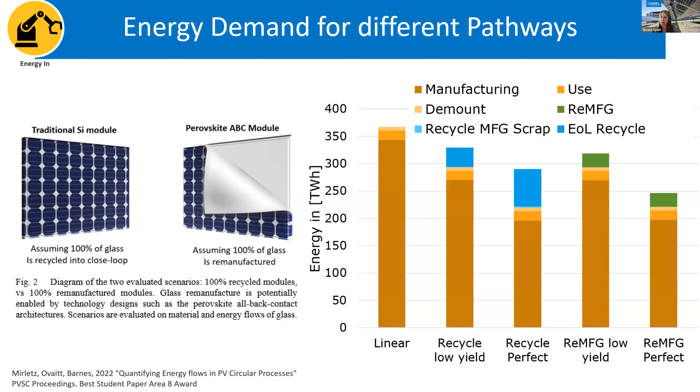Again, we have a lot more work to present on the energy balance of the systems and the metrics that really matter, as well as how things like doing perovskites that you can remanufacture, so use the glass and remove the perovskite material, really offset the energy materials. I will not present them, but there's various strategies. We are evaluating them with this tool. I will point you to this paper presented at PVSC in a couple weeks, and to some of our research.

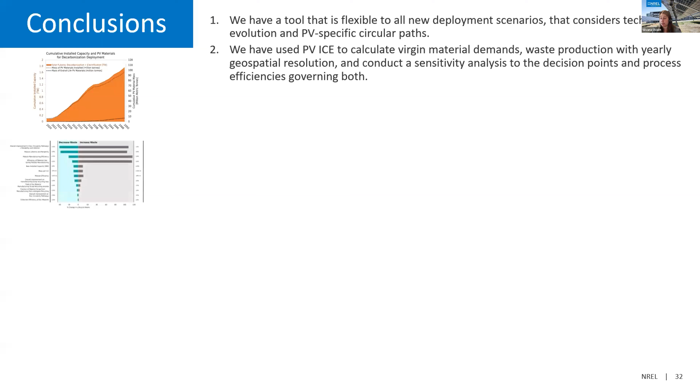Cool. That is it. Conclusions. We have a tool that can deploy different scenarios, technologies, and uses PV-specific circular paths. And we have used it to calculate virgin materials, waste, and sensitivity analysis of all of the parameters on the lifetime of a module. We can use this to evaluate novel technologies and identify lifetime and recycling thresholds to meet our decarbonization and material goals.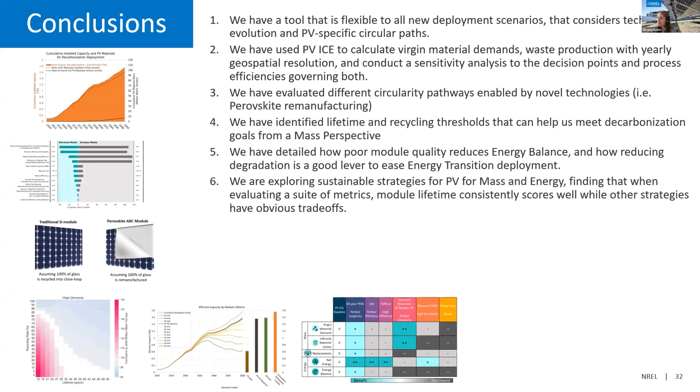Considering the energy balance is very important to the energy transition. More importantly is the fact that we want to deploy it right the first time and not have to be replacing modules, because that escalates the amount of materials that we need. And there are different strategies going forward, and evaluating them beyond the mass metric is very important.

Cool. Thank you. Excellent. Thank you very much for that.

So you showed us some areas where we're getting these bottlenecks, but to reach this 600+ gigawatt deployment level, and looking at the whole manufacturing and deployment and all the steps that go into that, are there any other areas that are going to be very badly impacted by scaling? We heard some of the previous discussions saying this area of manufacturing might be okay, but are there any other areas you think might be the bottlenecks to scaling that process up?

Well, I know right now on manufacturing, silver is foreseen as a critical material, right? We also have polysilicon right now dictating a lot of the module manufacturing capabilities. A lot of countries are starting to have their fabs, but they start perhaps not from the very beginning, right? From the raw silica. So doing that process more widespread in different locations is currently one of the bottlenecks also that I can think of.

Thank you. There's a question in the Q&A asking for your opinion on repowering, whereby utility scale solar farms are repurposing or replacing their solar modules after 10 to 15 years and rehousing or moving those panels to other locations. What are your thoughts or opinions on that?

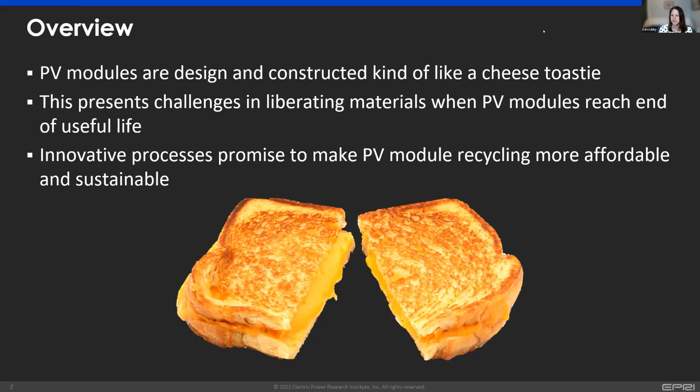I'll be talking about some innovative processes that promise to make PV module recycling more affordable and sustainable by recovering more of those valuable materials. Okay, so why do we care about PV module recycling? I think Silvana covered most of this. In the US, these modules could have material value of 15 billion in 2050. For global, you could multiply that by about 10. Similarly, the materials recovered could be used to manufacture new modules, so perhaps 2 billion globally, which offsets demand for virgin materials.

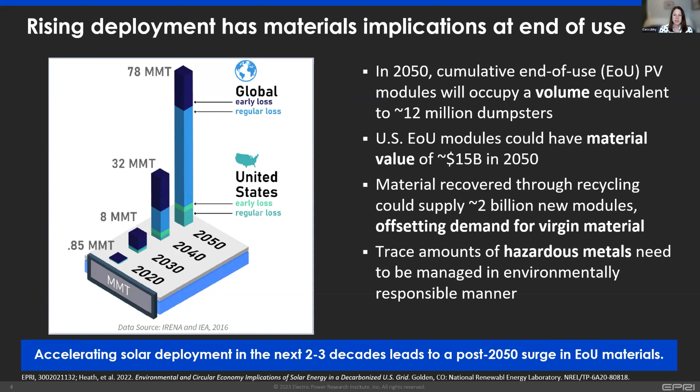We also haven't talked too much about trace hazardous metals. Recycling is one way that those materials could potentially be recovered and managed in a responsible manner. We've heard a lot about solar in a circular economy. I'll just emphasize that starting up front with the design of the modules can really prevent a lot of these challenges around recycling, extending the lifetime later. So designing durable, reliable products that don't have toxic materials in them or are constructed in ways that they can be more easily disassembled later could be some of the ways to increase the circularity of solar and minimize waste.

Similar to some of the other speakers, EPRI is looking for ways to provide guidance on management options. So PV plant owners, as the waste generators, carry responsibility for module management. And even though there are module warranty provisions, there have been many early losses due to damage or failure that are driving near...

Sorry to interrupt, Cara. Your microphone's sort of coming on and off. I don't know if you just need to bring it a little bit closer, it sort of gets louder and quieter. Yeah, I'm not sure why that would be. I don't know either. Is this any better if I bring it closer?

I can hear you again now.

So decisions, we heard a little bit about repowering and whether that is something that makes sense to be getting more capacity energy generation for a given parcel of land. Decisions around plant management as well as module management could be influenced by economics, policies and regulations, whether the PV plant owner has certain practices around environmental responsibility or corporate sustainability goals, and availability of services, which has historically been a challenge in the US, and I believe is also a challenge in many other parts of the world.

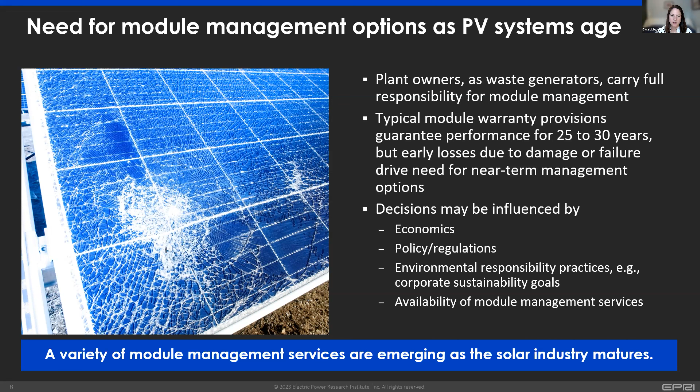So in the US, we perhaps have more options available than in the EU, where there are regulations in place, but certainly reuse is a common option if modules are still performing well and safe to use. You've heard a little bit about the need for standards to support decision-making about which modules can be safely reused, but this provides an opportunity for revenue or tax savings when those first life modules are taken out of service.

Recycling costs for crystalline silicon modules in the US are anecdotally in the $10 to $30 per module range. Landfilling is an order of magnitude lower cost currently at about 50 cents to $1.80 per module. And then if modules are classified as hazardous, they need to be managed as such. And those disposal costs start at around $3.60 per module, but can be much higher depending on the amount of lead or other materials, depending on volumes, other factors. So this is sort of where PV plant owners are facing some of their decisions when it comes to end of life options for PV modules.

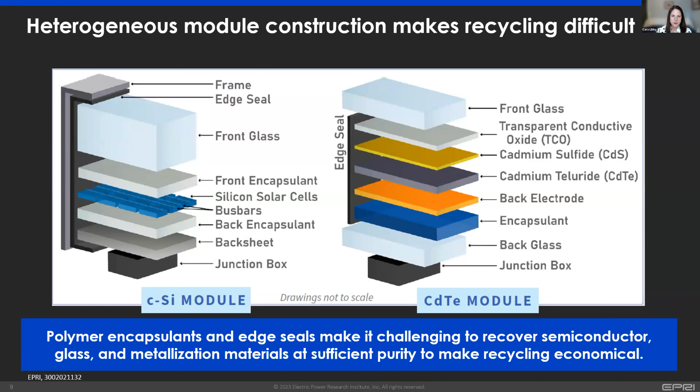So a list of barriers to cost-effective recycling. A couple of the other speakers identified some of these as well. So the lack of design for recycling. There's also a lot of variation in bill of materials. So depending on the manufacturer, the module type, when it was produced, and even what factory it was produced in or what line within the factory it was produced in, there can be small variations in the bill of materials. And so when recyclers receive these materials, they might be dealing with 5 or more different glass compositions, for example. And so that can make finding an off-taker for that recovered material more challenging.

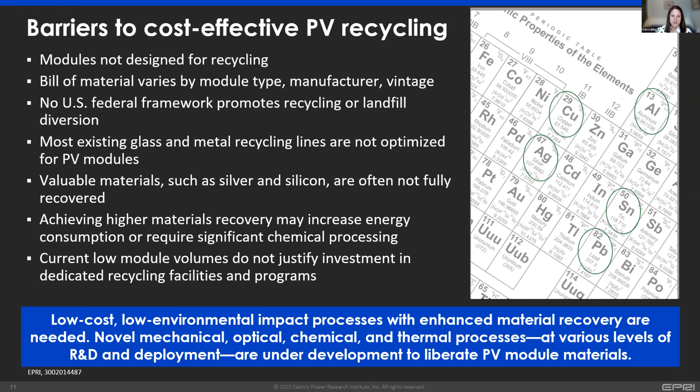In the US, we don't have a federal framework to promote recycling or landfill diversion. So that creates some uncertainty around PV recycling. And we heard a little bit about how existing recycling lines are not optimized, and as a consequence, valuable materials like silver and silicon are often not fully recovered. And to improve those recovery rates for those metals may require increased energy consumption or chemical processing. And we also heard that low module volumes currently have made investment into this space a bit slower. But we're certainly seeing a lot of progress, and we're seeing examples of different mechanical, optical, chemical, and thermal processes at different scales of development and deployment becoming available to process these materials.

So in our study, we did a literature search and patent search. We observed that there's a trend towards increased interest in PV recycling. Many countries are considering policies on PV waste. And as a consequence, research interest is high, really ticking up around 2010 when there was increased PV growth and also implementation of policies in the EU.

Most of these studies are authored by research institutions and universities. First Solar was one of the only companies that was authoring publications. The most publications were from the US, followed by Italy and China. I thought it was interesting that emerging or developing countries such as Ghana, Nigeria, South Africa, Mexico, India were also publishing, perhaps in anticipation of managing some of these materials.

In the patent space, we similarly see increased activity starting roughly 2008 or so. Many of them are targeting recovery of valuable materials or recovery of toxic materials, primarily from commercial PV technologies. And recovery is performed using a variety of approaches: mechanical, chemical, thermal, or some combination of those. We're mostly seeing patents filed in the major markets for PV and where they're produced. And patent owners are predominantly PV producers or suppliers, research institutions.

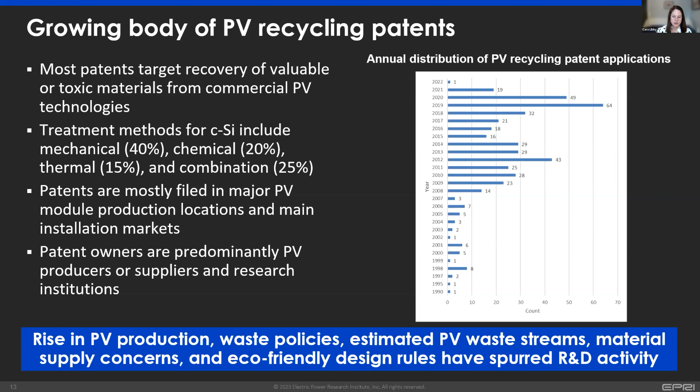So we repeated a survey of PV recyclers that was initially performed in the 2016 timeframe and done in collaboration with NREL in that first survey. At that time in 2016, we identified 25 global recyclers that accept PV modules. And this year we identified 177 recyclers. So certainly growing interest. Just in the United States, we identified 38.

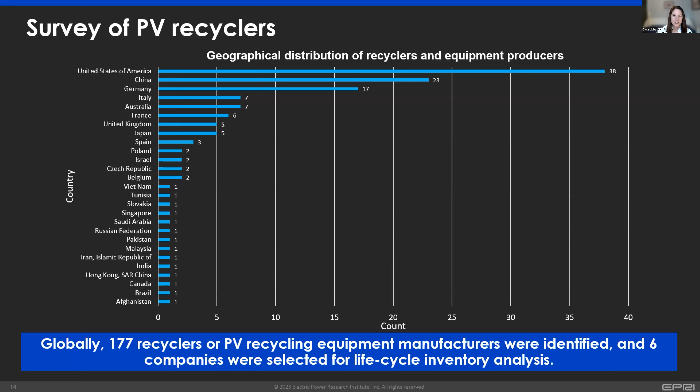I think I've heard of an additional 3 or 4 just in the past couple months that have announced plans. So certainly growing commercial interest in providing PV recycling services. Oh, and in the UK, there are companies captured in that search.

So what can we do to drive down the cost of recycling? So this brings us to our life cycle inventory review. And we had 6 recyclers that were willing to provide data and information on their facilities. First Solar is a major recycler in multiple countries. So 4 recycling facilities with overall capacity of 50,000 tons per year. And we heard from Peter some of the details of that process. So I won't spend much time with that, but recovering over 90% of materials for cadmium telluride technology.

Another major recycler in Germany is Reiling Glass Recycling. They are a commercial glass recycler and have 3 plants in Germany that are processing crystalline silicon modules on a batch basis. Last year, they processed about 4,200 tons of PV modules, and they are now constructing a facility that will be customized, dedicated to PV module recycling with 50,000 ton per year capacity.

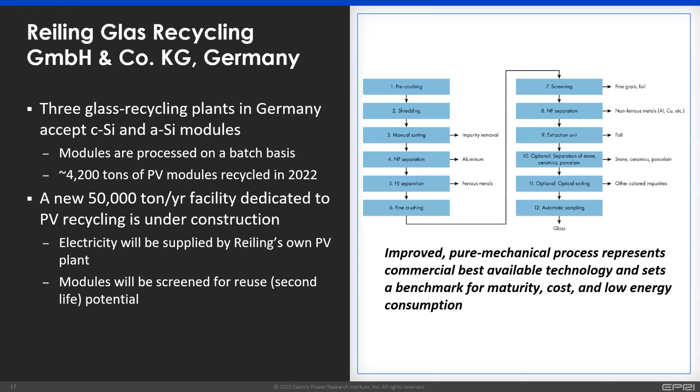Lux Chemtech is operating 2 recycling facilities in Germany, and they've developed a process that can accommodate a variety of different PV module types, so both crystalline silicon and thin film constructions. They're developing a 1,000 ton per year pilot system, and depending on the technology, it'll use either water jet to separate the backsheet from glass backsheet modules, or light pulse technology for glass-glass construction that softens the encapsulant and allows for glass to be separated from the rest of the laminate intact. They then have a series of chemical steps to increase the purity of the metals and the silicon that's recovered.

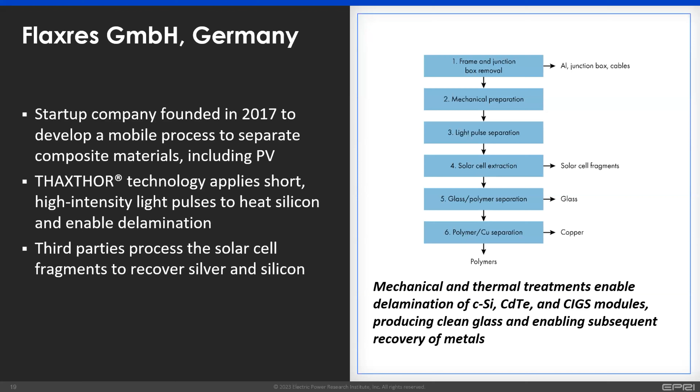FlaxRes was mentioned as a startup that has developed a mobile process. They are able to also accommodate both crystalline silicon and different thin film module types using their high intensity light pulse to heat the silicon, which softens the encapsulant and enables delamination. They're currently working with third parties to process the remaining solar cell fragments and recover silver and silicon.

Another startup company that was mentioned is ROSI Solar. They're very focused on recovering silicon at high purity. ROSI stands for return of silicon. Some of their work involves a partnership with Soren and Envie in France. They are using pyrolysis to remove the polymers, and that results in silicon with 5 nines purity, so 99.999% pure silicon. And their new facility will be 3,000 tons per year.

They can process both modules that have had the glass removed by their partners, or they can perform pyrolysis on the full modules. And the data for this project is for the full module pyrolysis scenario. And our final recycler is Tialpi. You may be familiar with their predecessor, FRELP, which was funded by the EU about a decade ago.

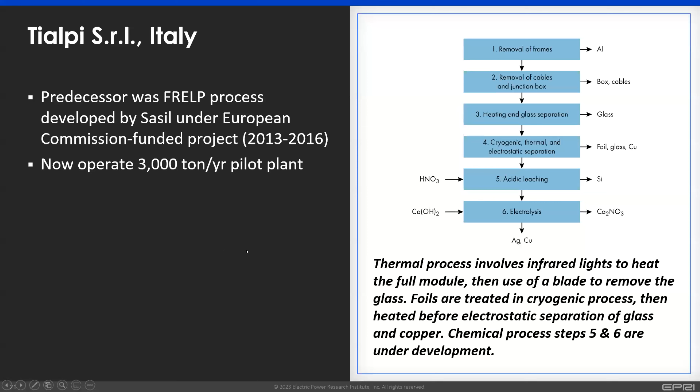They are operating a 3,000 ton per year pilot plant, and they have a very unique series of thermal processes. First is using infrared lights to heat the full module, then a blade to remove the glass, and then they use liquid nitrogen in a cryogenic process to further separate materials electrostatically. So they're still developing the last couple of chemical process steps. For that reason, we set our boundary for our LCI comparison before those final separation steps. And I'll show that on this summary slide.

So it's very difficult to compare the LCI data from these recyclers because they are processing different modules. So the composition is different. Some of them are building their facilities, and so the data they're providing are projections in some cases. So my takeaway here is don't place too much emphasis on the comparison here, but we did set a consistent system boundary at the point where a cell fraction, including the metals, is separated from the glass and polymers. But there are other differences here that make direct comparison imperfect, I'll say.

For recyclers, we looked at where we didn't include the full final separation steps. But I think what we see here is that Reiling, the fairly established mechanical recycler, has set a benchmark in terms of maturity, cost, and low energy consumption. Most of the other recyclers are operating pilot scale facilities using advanced thermal, mechanical, or chemical treatments in an effort to improve recovery. And First Solar, of course, as we've heard, is very experienced in recycling cadmium telluride technology and has a mature process.

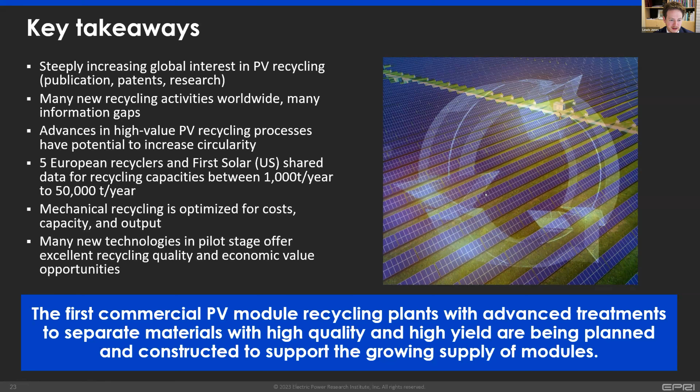Just a quick question from me towards the end. You were able to compare those things. We understand there's going to be limitations in having to compare different life cycle assessment sources, but are there any different technologies within there that seem to be the most promising ways of recycling things, or what's the key benefits we get from comparing the different life cycle methods?

I think we really need to see the economic data alongside the LCI data. Yeah, there's a lot of promising technical work that's been accomplished. I think once some of the either commercial or pilot scale facilities are producing real data, and we can both validate these numbers in the LCI analysis and maybe have some increased understanding of the economics, it'll become more clear if there

are winners. But I agree with the previous speaker's perspective that we need all these solutions, and some of these technologies may be better for one class of modules than others, or for one reason or another may be more feasible in some locations than others. So, sorry to dodge the question, but I don't think there are. No, that's brilliant. Thank you very much.